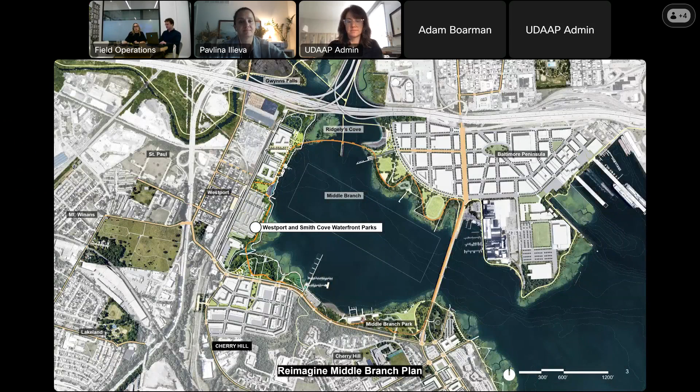So this is our site. We're working on a little bit bigger and more expansive than only the One Westport site. So we're working on this sort of corner, I would say the southwest corner of the reimagined Middle Branch shoreline and waterfront areas. Just flipping back and forth between what's there today, this is the long-term vision for the site. This is the Reimagine Middle Branch plan. And so you see this being a place of development and waterfront parks and trails coming together here.

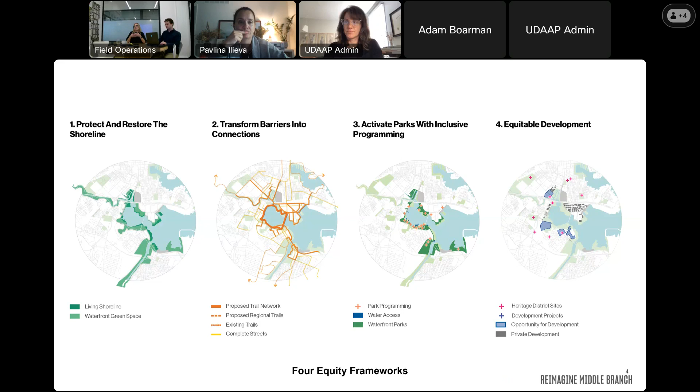Just as a very quick reminder, we had 4 frameworks we were working with in the master plan about the shoreline connections, activated parks, and equitable development. And what's exciting about the Smith Cove and Westport work is it's really bringing these frameworks together and realizing them. So zooming in on the site, I think you're all very familiar with where we are. But again, we're working at what we're calling Smith Cove, which is the western portion of Middle Branch Park. We're looking at the One Westport development site, parcel P, the open space there, as well as a DOT-owned parcel north of that. So that area between Westport and I-95.

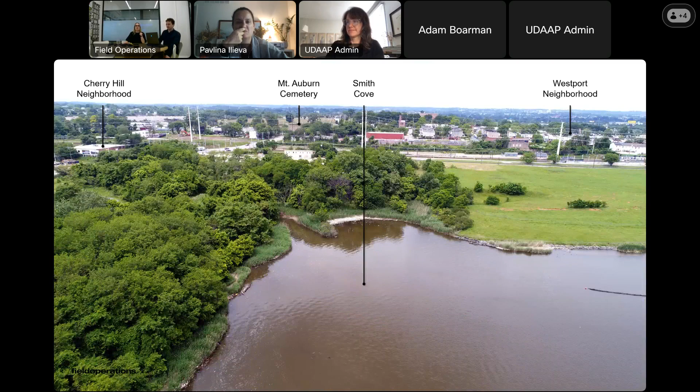This is a drone image we took of Smith Cove. The area is very kind of overgrown today. You can see Cherry Hill and Mount Auburn in the background. This is what the site looks like today. So it's park space. There is a boardwalk, there's an overlook, but it's quite overgrown and not in good shape.

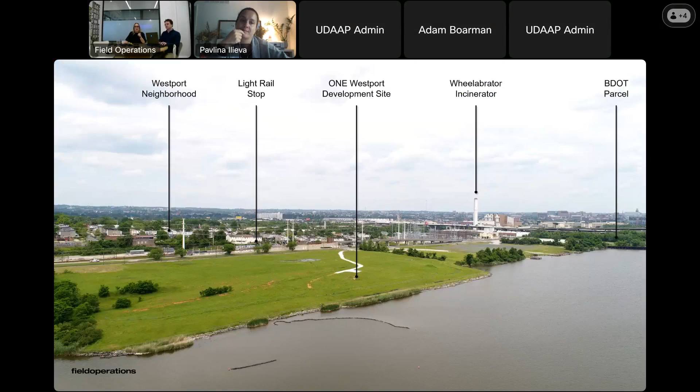This is the One Westport site and the DOT parcel from the water. And this is breaking ground next week. One of the major challenges we face is connections. The group talked about this morning, so we won't go into detail, but this image is a very visceral representation of all of those barriers between the neighborhoods and the communities and their waterfront.

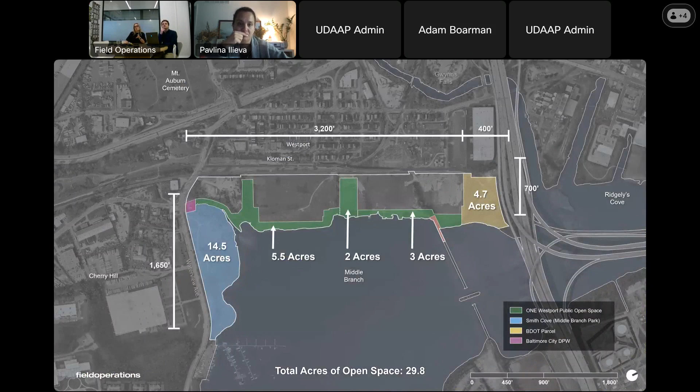This is our site again. These are just the acreages and the scale of the spaces that we're working with. We're just shy of 30 acres of open space when you put all of this parkland together. And that's really the big opportunity we see with this project and why we're so excited. 30 acres of open space in Waterfront Park is really significant in South Baltimore. And this connects to a much broader network of green spaces as well.

And for us, the vision for this park is really threefold. It's a community destination for the people who live in Westport and Cherry Hill. It's about celebrating the landscape of the Chesapeake Bay, and it's about honoring the heritage and the history of Westport and the people and the place.

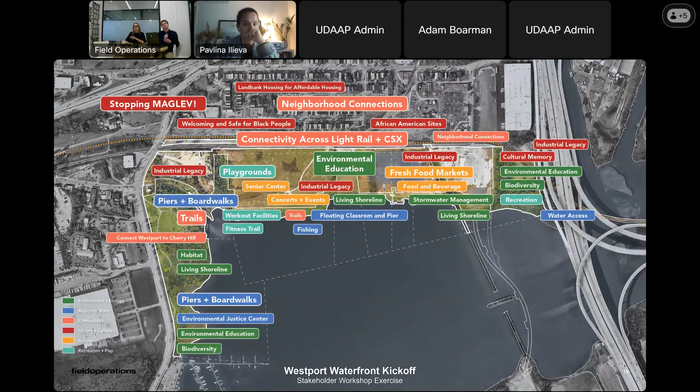That consensus building started with our stakeholder group. This is our initial visioning workshop with them back in May of 2023. We got many ideas about what should happen in this park on this site. What was very interesting was that all of this did reflect what we had heard in the master planning process. So we're getting very consistent feedback about what people want to see on site.

And overall, we got these 6 topics or 6 priorities that people wanted to see in the park. Connectivity, number 1. Number 2, the environment and ecology. 3, access to water, being able to get to the water and interact with it. Activation in the park, so how do we create spaces and opportunities for events as well as gatherings. Recreation and play, and history and culture.

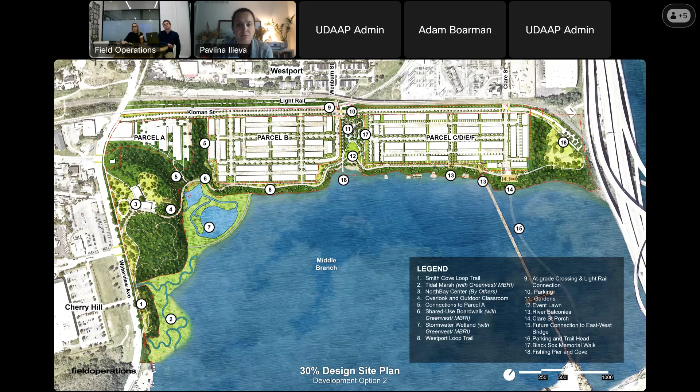As you can see, there's some options at parcel C. We know that our partners at Kimley Horn and Stonewall are working through those options now. We have some of those options baked into our deck here as well today, just for you to be able to evaluate.

The basis and the framework of the park is grounded in our circulation network. Connectivity is so critical and so difficult and challenged in this part of Baltimore that creating the trail network and making sure connectivity was working was paramount and number 1 for us. The network is based on the master plan, again, the idea of a loop trail. This loop trail circumnavigates the heart of the Middle Branch, 3 miles.

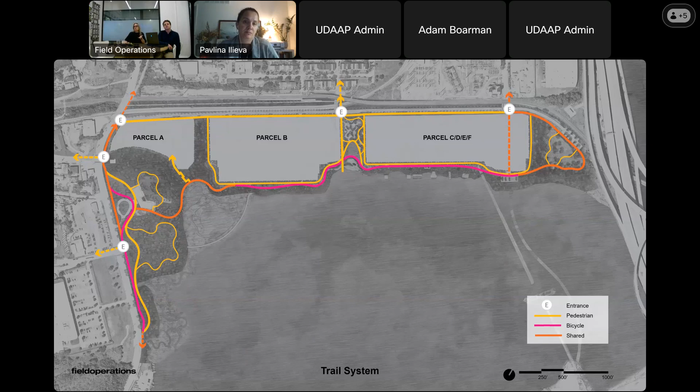...around the heart of the Middle Branch. And ideally that loop trail is a separated pedestrian and bike system with separate facilities for both of those types of users. In some areas we can't do that. We don't have enough space. So we create shared use paths.

In our 30% drawings, we've sort of taken from that diagrammatic level and started to think about dimensions and materials for each of these types of trails. Here you can just start to see how that plays out. This is the separated use trail at parcel B. So this is on the waterfront looking out to the water, and you can see the pedestrian path is quite close to those row houses that are facing the waterfront park.

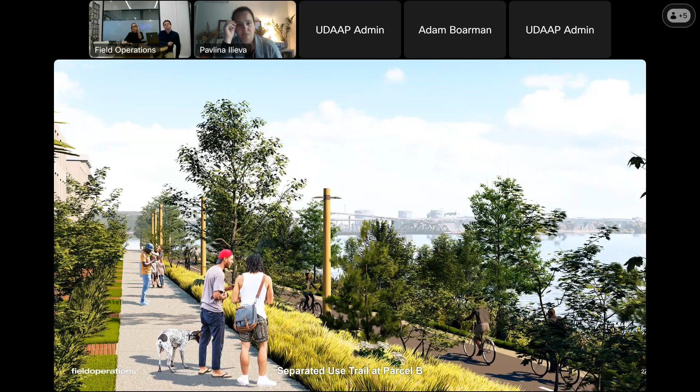Their lead walks connect to our pedestrian trail. And then slightly down the hill, you can see the bike trail, which is a two-way bike trail at 12 feet wide. And then you go further down to the green shoreline. Along the trail system as well are a series of features and crossings that we want to call out. One of the features is the boardwalk at Smith Cove.

I also want to mention here in this image, you see these expansive wetlands. One of our project partners is Greenvest and the Middle Branch Resiliency Initiative. They are designing a 5-acre stormwater wetland facility here, which you can see in this image, and we're collaborating with them on the design of the boardwalk. So this links Smith Cove to Westport with the boardwalk over the wetland, kind of hugging the shoreline edge.

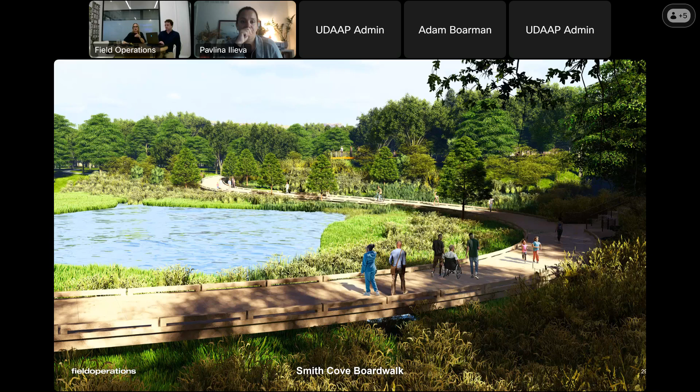And then at certain places, we have places to stop, get off your bike, or grab a seat and take in incredible views of the water. We're calling these balconies. We'll show you those in more detail later in the presentation. These balconies and many of the features in our park, as we mentioned before about the Chesapeake Bay landscape, the design is really trying to evoke the piers and piles that you see across the Chesapeake Bay and bring that to the park system in Westport.

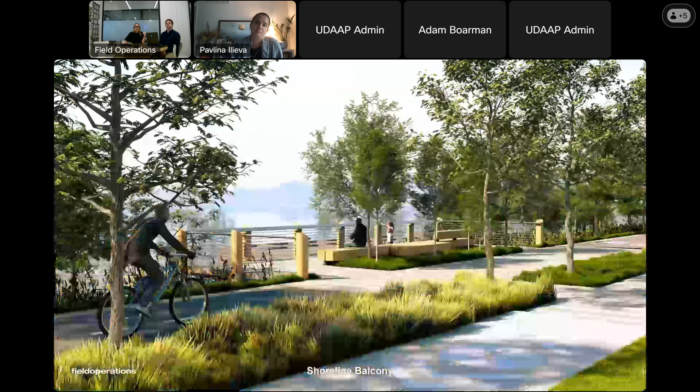So you can see here, this is one of the shoreline balconies, and you can start to see that play on the pier piles and the really chunky wooden furniture and the kind of native plantings here in this image.

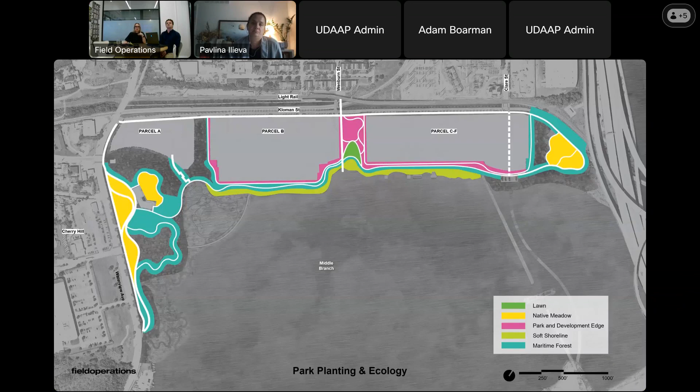The next layer we want to briefly touch on is park planting and ecology. We're working on what we're calling the 5 landscapes, going from the water and the shoreline, upland into maritime forests. We're looking at restoring woodlands within the parks today. We want to bring native meadows to the parks, have less lawn and more pollinator meadows and gardens. And we're thinking about this idea of a kind of maritime microforest.

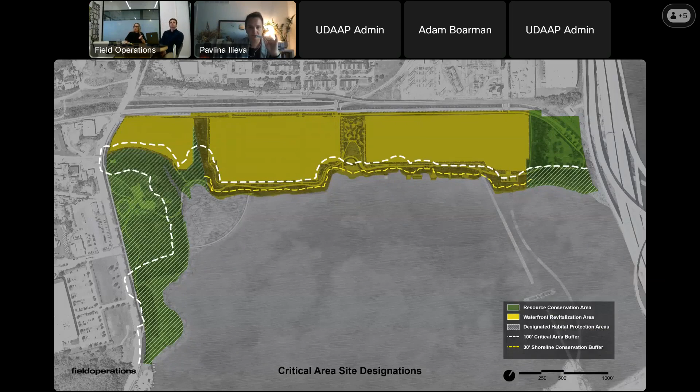We're working within the critical area. So we've done our due diligence and homework to understand what the requirements are to work in these various areas along the waterfront, where we can and can't do things, and what it means to mitigate in this area. So our afforestation requirements are really driving some of the planting design. And so we're using these criteria and these guidelines to try and think creatively about planting design here.

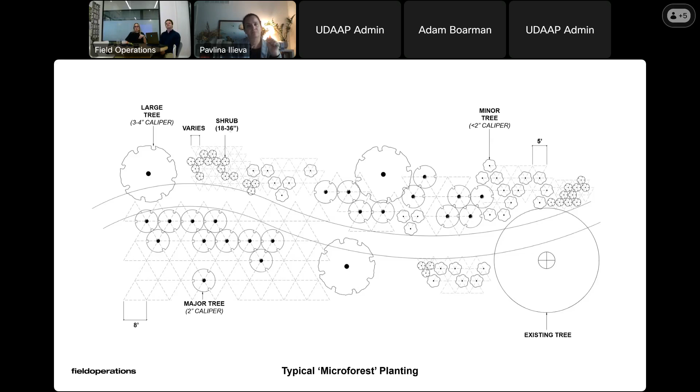Something that we're excited about is the use of smaller plant material, but in large quantities and spaced close together. This is how you would plant a microforest. It's how plants want to grow. It's how they want to be out in the world if you find them in the forest naturally. And we want to try and mimic this and use this as inspiration for the planting within the park and along the trails. This is an example of that in other places, and this is really at the forefront of ecological systems thinking in urban forests across the country.

So how are we grading the site? How are we reinforcing the toe of the slope? What are we planting here? And what other measures are we taking to ensure that we're creating a really robust but green soft shoreline?

At the shoreline at our park space, we've widened out and made a much shallower shoreline. Here we're calling it a gravel cove. You'll see images of this later, but this is the one opportunity we have to make a much bigger, more gradual shoreline, which we think is programmatically and from a design perspective quite interesting, and is also going to bring great ecological benefits to the park.

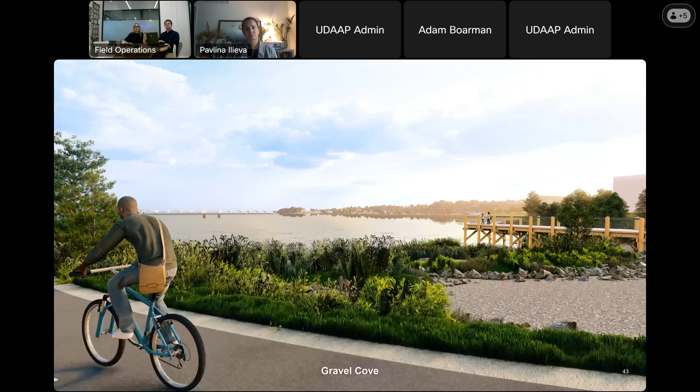This is a kind of inspiration image for us. This is in Seattle, but that idea of a soft gravel shore is interesting to us here. And so this is an image of that at the park space in Westport.

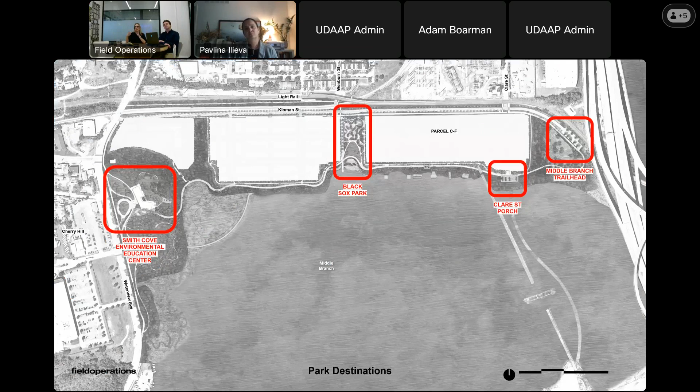Finally, I want to just touch on the destinations within this park system. So first, talking about the trails and the planting, we're really doing park-wide systems thinking. Now we want to zoom in and look at each of these destinations where there is a hub of programming and activity. We're going to start at Smith Cove and work our way north. We've turned our plan, so now we're looking true north as plan north. We're looking at parcel A, which is the Westport development and how it integrates into Smith Cove.

Our team through SVGP and the city are collaborating with North Bay, which is an environmental education nonprofit, and they are interested in potentially building a center here in Smith Cove. This is dependent on BCRP and the conversations there. So at the moment, we're holding a placeholder there. We can't answer too many questions about that today, but we're holding that space for future design considerations.

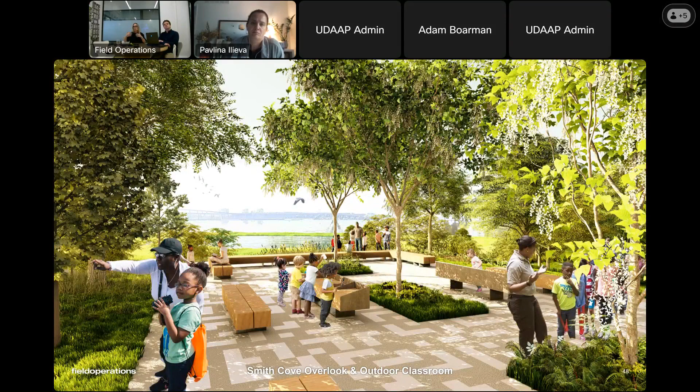Around there, there's parking and drop off for that center, nature trails, an outdoor classroom at number 8, a picnic area at number 6. Again, finding ways to gather and have smaller community events here in Smith Cove is the idea. This is the picnic area, and then this is the overlook. We're using the natural high point on site where the overlook is today, opening that up, making it bigger and more accessible, and creating an outdoor classroom here.

Now we're moving to the Westport Waterfront Park. So this is the space between parcels B and C, which is the larger 2-acre site for this bigger public park. Starting at number 1 at the top of the screen, this is our at-grade crossing. Getting people from Westport to the park is critical, so making sure that they have a safe way to cross is quite important.

That's a big challenge with CSX being there, having to come under the light rail, go over the CSX lines. It's not easy. But we're proposing crosswalks there to do everything we can to get people from the neighborhood to the park. Then once we're in the park, number 2 is what we're calling the promenade or Wenburn Walk.

This is trying to take the view corridor down Wenburn and give you the most direct route out to the water. So that's a promenade. There's lighting overhead. There's benches lining this promenade. And there's a clear direct extension out into a fishing pier to get you out over the water. At number 4 is an event lawn. At number 5 is a nature play area, and at number 6 is the beginnings of the Black Sox Memorial.

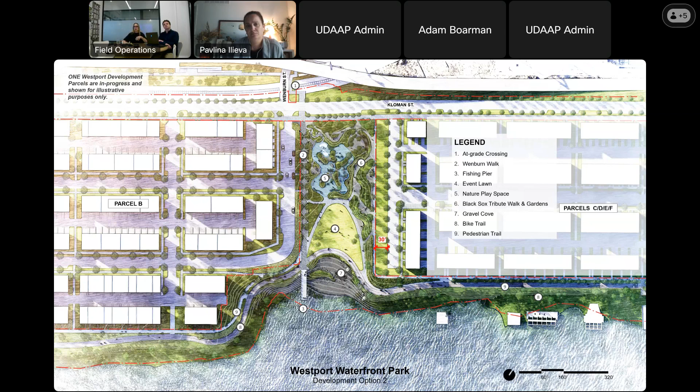Here we're just testing the 2 ideas. I know that the team shared options this morning at parcel C, so we just took those options and are starting to look at how they would fit on site. This is not yet totally coordinated. As you see, I think if this option were to play out, we would fully integrate that into the park itself. So the park would essentially grow by 30 feet here. We would rework the planting and the circulation and otherwise.

And then this is just starting to look at views of the park here too. So you can see that gravel cove and that soft shoreline in the foreground, the fishing pier, the bike and pedestrian trails, Wenburn Walk heading back to the neighborhood, the nature play area, and the memorial. And then again, we're just showing the options here at parcel C.

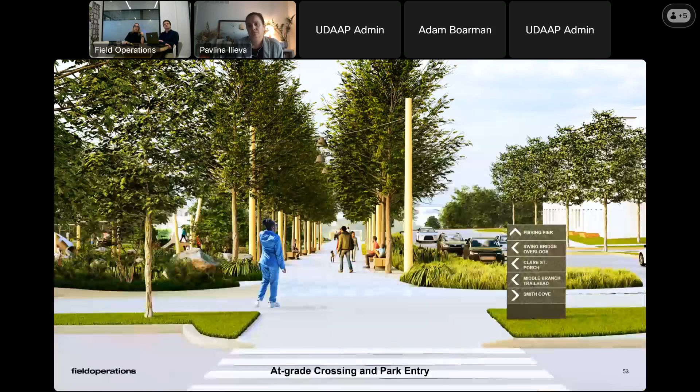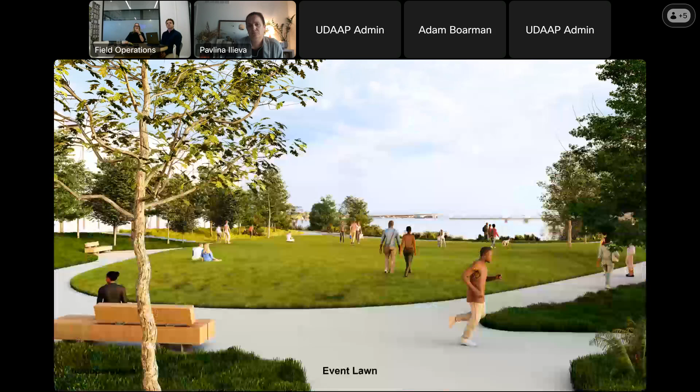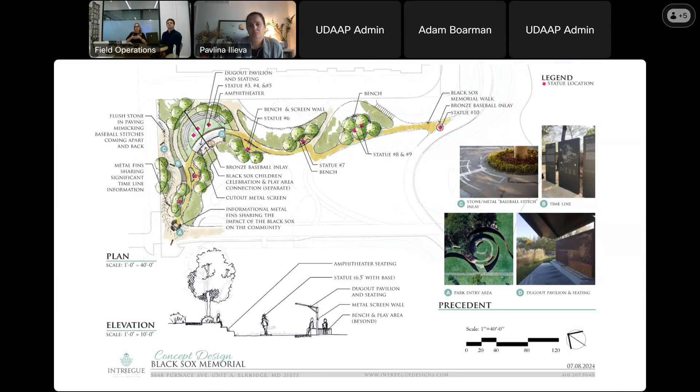A couple of views. I'm not gonna say too much here because I know we're trying to go quickly through this, but these are a few eye-level views of what the park would look and feel like across these different areas. This is not our work, this is the work of the Black Sox Memorial team, but we've been working with them to integrate their thoughts and ideas about what that memorial would be. I think next steps there are to start to think about engaging an artist, doing more public engagement work here to really understand how the memorial can be sited and integrated into the park design.

And then the last destination in the project is north of the One Westport site, what we're calling the Middle Branch Trailhead. So here we're extending Kloman Street into the site and creating a parking lot. From the parking lot, we have a spot to get out, take your bike out and get on the trail and take a multi-mile ride along the Middle Branch Trail. So if anyone's coming from further afield and they want to do a big ride, this is where you would start off from.

And you can see other trail connections and the other footpaths through a restored meadow at the trailhead site. This is a view of that swing bridge balcony. This is a view of the Clare Street porch. And then this is an overall aerial showing the project in its totality. And that's where we'll stop. Hopefully we got through that quickly. And we're very excited to chat with you about the design.

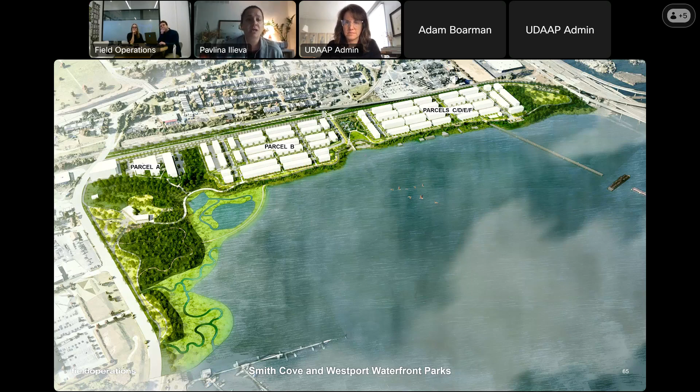So as part one, we would love to zoom in and get a complete picture of some of your design decisions at this point. And then on another note, we would like to pick your brain about some of this additional integration. So if you don't mind going to your site sections, there were just black and white drawings showing sections through the park and then another one through the townhouses.

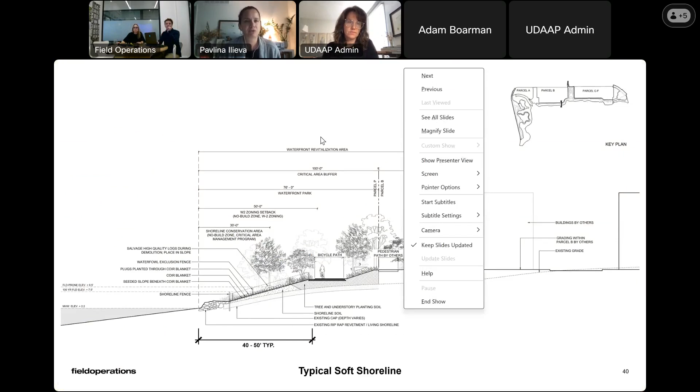And they were clear enough to understand in totality, but I wonder if you can zoom in just a little bit more so we can read the notes as well and give us a dimensional understanding and also conceptual understanding of the layers involved in this section. And specifically, this is the subject that came up earlier, especially the portion of the master plan that has changed the most with respect to typology.

Yeah. Obviously, the entire north half of the site is now townhouses. And so as part of our previous discussion, we questioned this idea that before, the townhouses were in a very designated portion of the site that was always intended to be a little bit more intimate, a little bit more private, where you move around the periphery of this.

And now by virtue of this becoming all attached dwellings, whether they're stacked or single family homes, it has so much more of a private experience and interface, so much so that even in your plans, all we're showing is just circulation around it. You can go bike around it and walk around it, but there isn't really any kind of a connection.

So in a previous conversation, we were saying, how do we negotiate this very private experience of somebody's front door right there at that stoop with something that everyone is welcome to come and bike and walk right around? What are those, both in terms of dimension, but also nuance of use? And particularly with this, we want to hear your thoughts. What are your thoughts on this?

The concern earlier was, is there the perception that the waterfront is more privatized? Yes, you can come and walk here, but you're going to have to park way over there and follow this trail, whereas these 12 or 15 houses have the front door open to it and looking onto the water.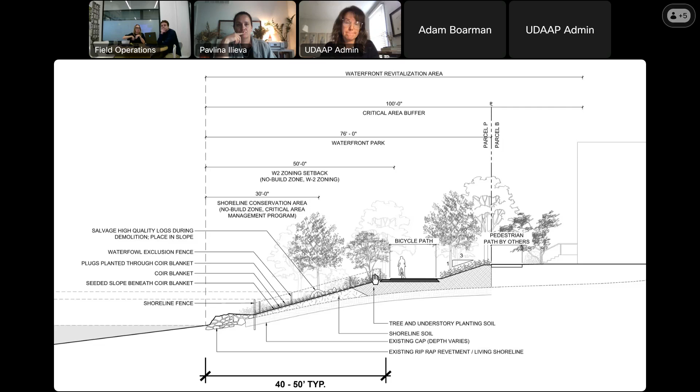On the other hand, I agree that there is a sense of, how do we not make that feel private, right? What can we do here so that that's not the case? I think the way that we are trying to do that in our design is by creating these features and these stops along the trail so that folks, when they're in the park, they're excited to get to the Clare Street porch. There's something else there. There's a piece of program or activation there that draws them through the park to get to that destination.

It's a lot like designing a linear park in that way, where you're trying to have certain continuous elements that are quite strong, like the trail is here, and then break that up with features and destinations that create a kind of episodic journey for you along that trail. So hopefully that kind of helps unpack that a bit. Happy to continue if there's other questions people have.

Yeah, certainly. It helps us understand how you're looking at it and what conversations you've had with others and how you're navigating kind of this relationship. So to that end, help us understand where it says bicycle path, and you had another diagram that showed how much of it is shared and how much is separate. So is that just a bicycle path or is it also a pedestrian one? Because then the pedestrian one is on the private parcel.

Yeah, we'll go back and look at that plan just so that we can understand the extent of it. But before we do that, just so we understand clearly, this experience that you are on a trail kind of within a landscape is really only happening on the bicycle path in this particular condition, because the pedestrians will really be walking in front of the stoops. I mean, the experience of the waterfront for the pedestrian is actually the one there on the right-hand side in front of the townhouses. And the experience of kind of within a landscape is really on the bicycle path. Is that a fair statement?

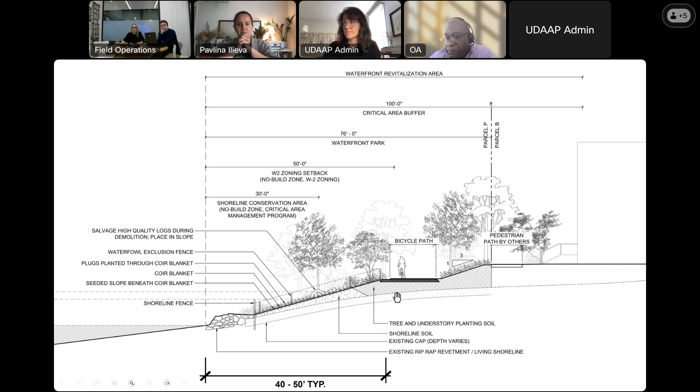I think it was really important to zoom in and see how much indeed we're pushing from the water, right? There are all kinds of buffers and all of that literally puts the line. You can't go any further to the left, right? And naturally the same thing is happening on the right-hand side. So it's important for us to understand the limitations, which we now do. So thank you. Let's do a similar thing with your other section, so that we can zoom in a little more and see, again, dimensionally and in terms of these different zones. We see with the dash lines on the left where the floodplains are pushing your little wall all the way there. So really that's this gravelly landscape that allows for the ebbs and the flow of the waterscape to come through. And then if we can pan to the right, walk us through the rest of the thinking, please, in dimension.

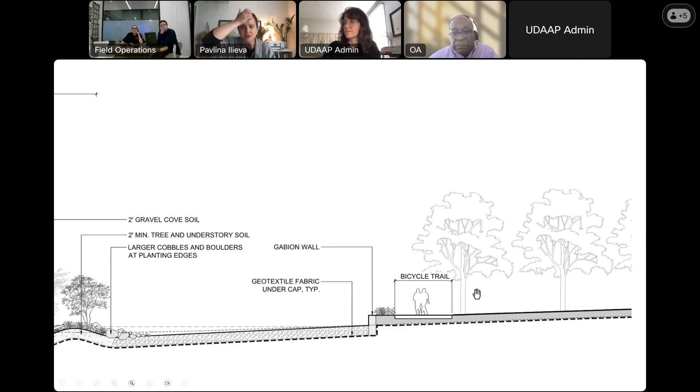Sure. So here. Oh, that's the end of this drawing. Maybe there was another one because it was showing more, I thought. Maybe not. Let me zoom out one more time. So this section is really just at the shoreline. Okay. We could find others, but yeah, you're right. So in the park, and we have a 3D aerial image that shows this area as well, to the right here where my cursor is would be the sloped lawn. At the toe of that lawn is the bicycle trail. And then we have a gabion wall that could be a seat wall there, which is the edge, and then to the gravel cove.

And then we would have our very shallow sloping gravel cove moving down into the water. Today, actually, what's interesting is we will be excavating this area out.

There is a kind of berm here that's heavily planted and it blocks all the views of the water in the park. So we don't want to keep that because we want the park to have the big open, beautiful views of the water. So we are sort of modifying that slope and moving that earth around to use that in other places for earthwork within the park. And this becomes this gentle slope.

Understood. Oh yeah, thank you so much. It's nice to see it, to understand sort of the modification of it, and the fact that it becomes a lot more gradual, softer, and it takes a lot of the movement of water. Thank you. This is very clear now. I'm going to pause my questions here. I know that the rest of the team will have other specific drawings they want to zoom in on, but this covers some of the initial kind of let's read this a little bit closer.

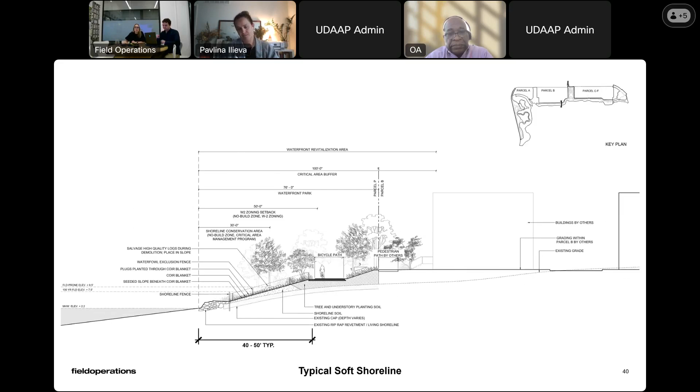Yeah. So there are places within the design where we're encouraging people to walk next to it, such as at the boardwalk and that marsh area. We're trying to keep out of the floodplain with our trails, so we are lifting higher than where the shoreline is. But I think that's a great point. Another issue, like we saw a constraint, is that we sort of need to get up and high anyways. We talked about the elevations, but there are key points. This is one of them where people may be able to get closer to the water.

But there is this real tension, I would say, Osborne, of do we want to overtly encourage people to get to the water or not because of the state of the water quality today? This is a big question. We've heard from many people and a lot of pushback that no, it's not safe to be close to the water, so the design should not encourage folks and invite folks to get close to the water.

Except that I thought I saw a very important portion of your program central to all of the site is a fishing pier. Yep. So what are we thinking? I know. I mean, that's part of the tension too. I would say, Osborne, that the water quality is not good. However, culturally and socially, there are a lot of people who fish around the Middle Branch. There are a lot of members of the community who are out every day fishing.

And we heard this and so there's this tension playing out for us in the design of, do we want to support those members of the community who are activating and bringing life to the park every day? Do we want to take on what the public is asking to sort of have a fishing pier here? Or do we need to step back and not allow people to do that?

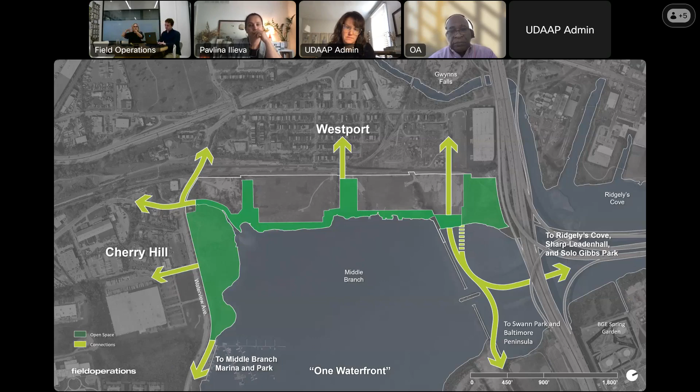So you're acknowledging it so that it's understood that you're not precluding the future connection. I think that's what you suggested. Exactly. And then what we're trying to do within our site boundary is make sure, like at the Clare Street porch, there's room and space there that does not prevent a future bridge and connection from coming in and landing there.

Got it. And then one final question. So the extent of your scope does not reach Kloman, with the exception of the parks that extend up that way, right? Or are you responsible for conceptualizing the crossing as well? The crossing from Kloman to the communities to the west. So we are advocating for that crossing, but the Kloman Street design is being done under a different contract with a different set of designers. Got it. All right, thank you.

You'll hear in my comments, I think there's a contradiction in your design related to the bike paths and the pedestrian paths, but I'll make those comments eventually. I think in part that's what Pavlina may have been alluding to. Thank you, Osborne, for your questions. We'll come back with comments shortly. Kevin, what are your clarifying questions for the team?

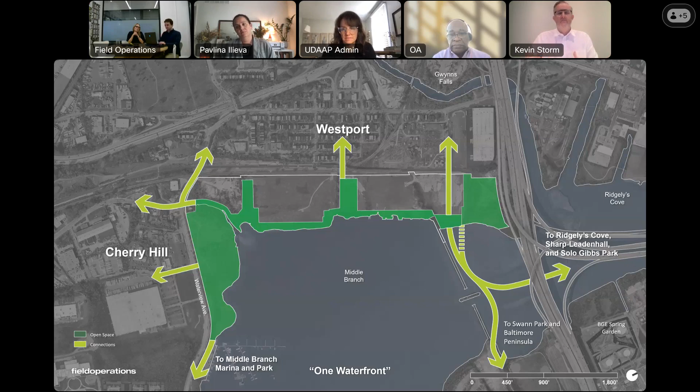Most of them were taken by the section discussion, so thank you for that. But I do have a question, and apologies if I missed any of this in your presentation, but could you talk a little bit about integration of welcoming and supporting amenities, like frequency of benches and bike storage or public restrooms, I think are a big one. And as a follow-up, was there ever any discussion about integrating some sort of small-scale retail kiosk, a small coffee stand or something in the park, to give people an invitation to stop and relax and enjoy?

Let me just, Kevin, pull up the plan to talk that through. We could start with furnishing. We have noted where our moments of pause are along the trail. There's a picnic area here, the outdoor classroom, the benches throughout the park space along Wenburn, along the edges of the lawn, through the garden space and in the play space. And then along the trail at the balconies at 13 and at 14 at the Clare Street porch. And there's another one here, which we failed to label, that dot is another spot to rest with benches, and then at the trailhead there's a series of benches and furnishing.

Also throughout the plan, there are bike racks. There's a cluster of them here at the trailhead, knowing people are getting on and off the trail here, as well as at the entrance of the park back here on Kloman Street, and a number clustered here at number 3 in Smith Cove Park. Lighting, we are proposing lighting along the loop trail itself, and then within the 2-acre park space in the center.

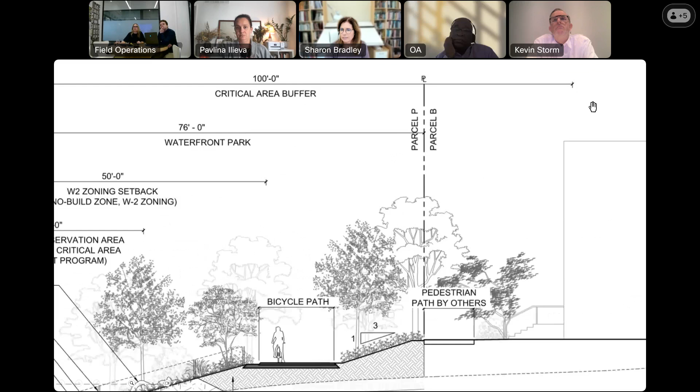My guess, Sharon, and I think it is a question for that team, but my guess might be if we look at my key plan up here, there are some areas in front of C through F where the shoreline is eroded and we get what we're calling pinch points. Let me just zoom in and hopefully you can see it on that map. You can see that it varies along this edge where there might be a pinch point in some of these zones versus where you have a wider space at the waterfront.

And I would imagine that 55 foot is potentially at one of these two pinch points here in front of C through F. Okay, and in those situations, your section would look quite different then. Yes. Okay. It becomes more constrained. Yes.

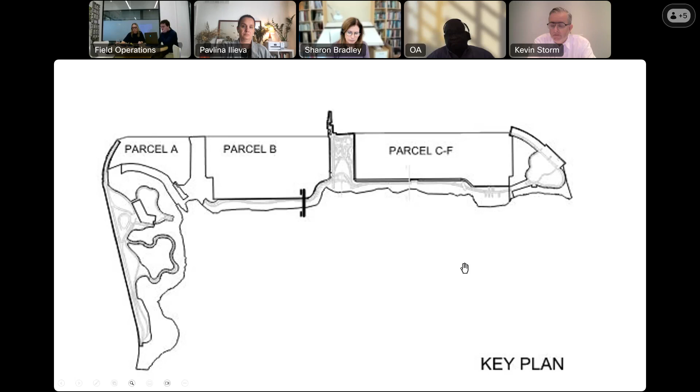Okay, and one of the questions I had, I think you answered with Osborne's question, is you don't really introduce people to be at the water's edge. The closest looks like maybe the gravel cove, where you don't go onto the gravel area. Correct. But you see it on the path. Okay, I see.

Okay, and it's so difficult to separate the issues between the townhouse development and yours. So do you happen to know the width? Because you do have the section here, this pedestrian path by others, what the width of that path is? 8 feet. It's 8 feet? Okay. All right. Those are my questions. Thank you.

Okay, thank you, Sharon. I only had a couple more. If you don't mind, on the larger plan, it's showing a connection to parcel A. Can you please elaborate a little bit on how you're connecting to that parcel? Yeah, maybe I can show you on the zoom in plan. Sure. That might be an easier place to see. So

we have a few elevations noted here on the plan, and that is to sort of underscore how steep this slope is. We have to go from 5 elevation where the boardwalk is up to 33, which is where parcel A sits. So we're at a very steep slope and pretty intense climb to get up that hill. And we are also in a critical area zone where clearing a lot of the existing trees is not wanted from a critical area perspective. So we're trying to keep a fairly small, tight footprint here.

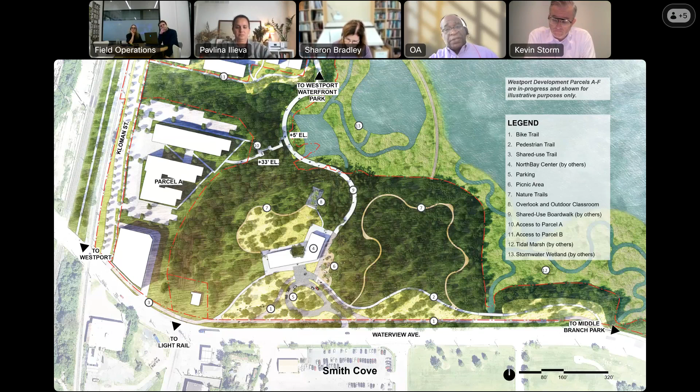Yeah, if it's okay, I just have one very important question to ask, and I'll jump right into the comments. If you recall on this section, I'm trying to understand where exactly is the natural water line, and where exactly is the tidal water line? Does that come all the way up to the bike path, or does that top off at the top of the riprap wall? Let's go back. We have those marked in this section, so we can show those to you.

So here, oh no, I was trying to zoom in. Okay. You just give me an idea. I mean, is it, yeah. So mean high water is plus 2.2. 100-year flood is 7.5. And our bicycle path ranges, it kind of goes up and down. The lowest point, I think, is at like +8, so that we're above the 100-year flood elevation. Wonderful. All right, thank you so much.

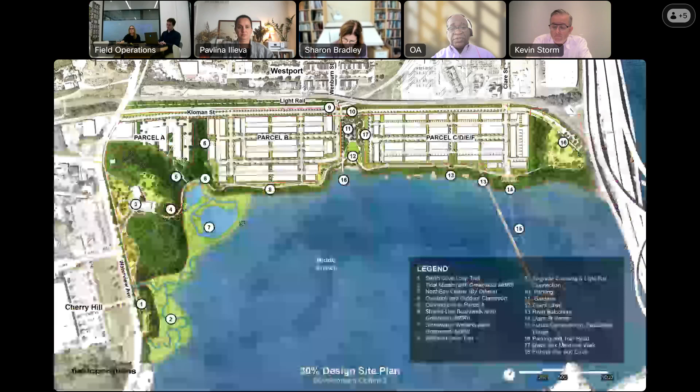If you can just jump back to a site plan, I think I can probably get through a comment or two pretty quickly. So when I look at this, initially when you did your layout, the presentation, et cetera, it was done very well, and to be quite frank, I'm extremely interested and impressed at this site and the robust framework that your team has mapped out to really deal with the challenges along the shoreline and potentially create a framework or basis by which the other development teams can come and stitch their parcels into what you're doing. So in that regard, I commend you highly.

But as always, you've heard the saying, the devil is in the details, right? And so is God. So as we zoom in and we look at this, we become a little bit more critical, not in a bad sense, but in a curious sense as to how things actually work, how things come together, and why decisions are being made. And I think you've been very forthright in explaining that to us, and I really appreciate that. But as we zoom into any portion of this plan, there are things that still need to be resolved. I'll first start with the things that I think are meaningful and done well.

The fact that you've identified destinations and you've carefully positioned those destinations, not just based on where they are on the site, but you've integrated the natural landscape into that. For instance, the tidal marshlands, everything that's occurring to the left of the screen, which I guess is to the south, as well as the park to the north, and how you've begun to integrate that and use it to the benefit of the project, while respecting the natural landscape. These destinations are not just points of interest, but they begin to anchor the project overall, particularly the one to the north, although it's much smaller. You can see how you're integrating access back to the greater community by introducing that parking area and so forth.

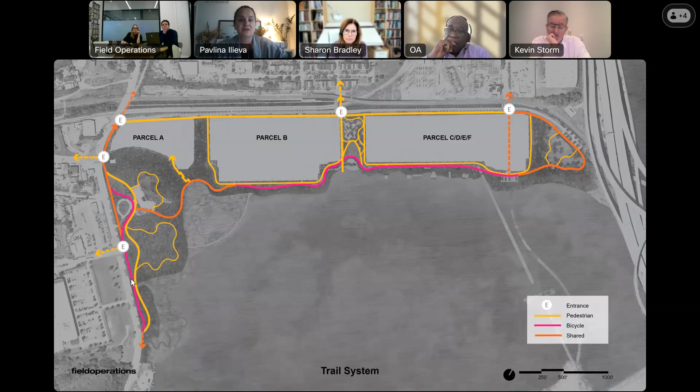So again, all that is a long way to say there's nothing you can do about what ends up being built on there, but there's so many things in the design that should be done that really start to anticipate that. So if we can go to the section now, in front of the row houses, I want to share with you some of the concerns that we explained earlier from the development perspective, but now from the park perspective as well.

I think the idea is that everything should feel integrated and continuous. Like Kevin is saying, that separation between public and private should not be reading in the ground, right? In other words, in great urban spaces and cities in general, you don't necessarily see that designation, and that's the beauty of it. We explained it earlier to Parcel A, how to make their parcel feel more inviting, urbane, and seamless, right?

And at the same time, successful urban spaces also have this very well-crafted design language that is clear to people, and there's a wonderful ambiguity to a degree that provides the richness of the experience, and then there's this clarity in the design that also delineates some boundaries that are a little bit more subtle and contribute to a more enjoyable experience.

So, for example, there's a difference with that path that's in front of the stoops there feeling like a public path, right? So you're on that path, there's no bathrooms anywhere in range. Do you know where I'm going with this? Yeah, yeah. And 3 feet away, there's somebody's stoop right there.

And I'm only saying this because it's happened at my stoop, you know, in the neighborhood in the city. People will sit on it, people will sleep on it, people will do whatever else they want and need to do right there on it, because it is so immediately next to a 5-foot sidewalk that you have simply no other place to go, right? So that's the kind of ambiguity that I can see sometimes not working out really well for the residents and creating a lot of tension and a lot of conflict.

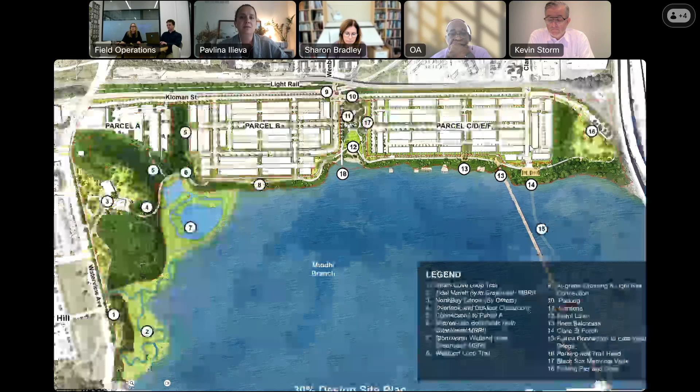So our ask now is to start to look in that other direction and really consider that people may not be arriving on those just on the trail, but if we are to make this a very connected neighborhood, go back to that first goal that we were discussing that we're not quite accomplishing yet, these nodes need to work 360. I see that right now you're trying to align them with stuff, and that's merely getting there. But I'm also curious about how they start to model the buildings. And how do they start to create mini hierarchies within them?

Because right now, and we talk to the developers about it, there's this relentless multiplication of 3 types of attached dwellings, right? But all conditions are not the same, right? At some points you're arriving at this perch, at another point you're arriving at that perch. It can't all be the same behind it, right? So if we're talking about things being integrated, I think those are the discussions and the modifications in the design that need to happen. And I think they need to be baked into the site plan in many ways, kind of through the alignment.

I'm looking at number 13, that bridge arriving there, that experience, and that angle is everything. And yet you go 10 feet more, nope, we're back to the 8-foot trail with that one row house there on the corner, so what, nothing happened, right? That's what we're looking to see. This plan and the connection between the development and the park will not be complete until these big moves and these ideas you've created in the landscape are followed through in the neighborhood.

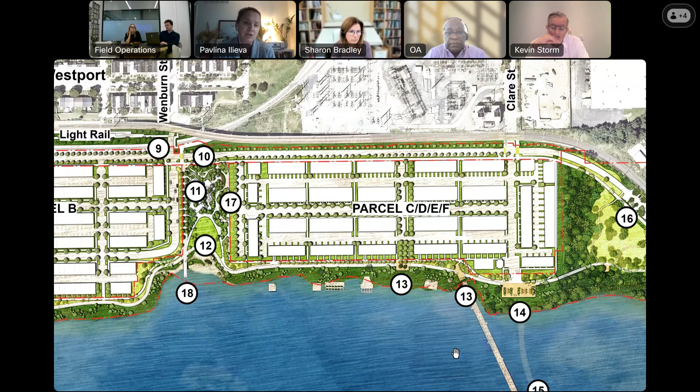And then similarly for the other portion, which is on the south end, with potentially the proposed new building there, I think it's important to also understand how much of the different activities and uses that the community might want in the future, and as it continues to grow, hopefully more residents and economic development is spurred here, how much of this design can accommodate for some of those things.

I think the idea of the anchor element there is huge. We know that every major park place needs its steward, and having a great organization that anchors it really adds a lot. But I wonder if there's more synergy that can be had there with some of the other needs of the site. And it's probably already happening. It's just once we get a chance to zoom to it, I think it'll be important to track that as well.

So we are a little over time. There's so much to talk about. This won't be, of course, the last time we see this and we work with you, but we want to thank you for the fabulous work that is done. It's not easy. You have more hard work to do. And I think some of the items that we highlighted are probably a little bit more of a priority because they inform and affect how all of these other projects develop.

So just very quickly, I want to check with the rest of the panelists. Are there any additional comments that came to mind since you spoke? I want to make sure that we cover everything.

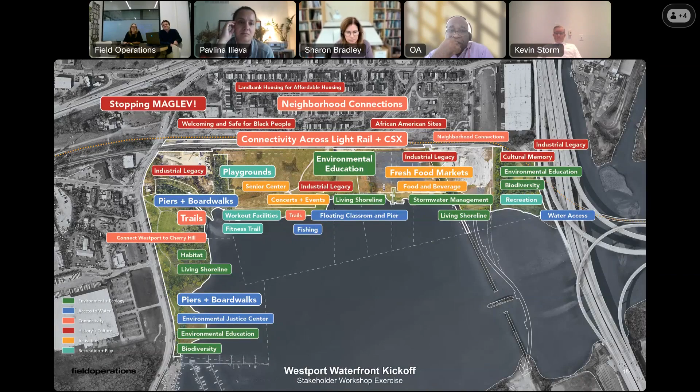Could I ask a follow-up kind of logistical question of the panel? Is there time for that, Pavlina? Yes, please go ahead. So I really appreciate all the comments today. It's really fun to talk to other designers, so I really love this forum. I had a kind of, maybe it's a procedural logistical question. Maybe it's just advice from this group.

When we look at the section and we think about what we can do here, I agree, we would love to continue exploring what can be done, and I totally understand all the comments today about the pedestrian trail. Because of this constrained space we have, which the section really describes, we're working within the W2 zoning setback of 50 feet. Is that something that you think we could push on a little bit and get some variance for to improve the circulation within the park space? We're working in a very constrained area, and a lot of our design has been driven by those dimensional constraints, which are tied to city regulatory frameworks.

So yeah, I think that's a valid question. I think this is entirely in planning department's purview to answer it. The panel, all we can do is offer comments that are hopefully helpful to you in furthering the design. But your question is very valid, and I would say that on many projects, a lot of these variances and modifications happen because the city is interested in the best design we can get. So the quick answer is yes, I think it's something you should absolutely discuss. What pathway there is to it and how possible it is, I think Ren and the rest of the team will be able to answer that more directly.

Wes, if I may interrupt for a minute, are you controlling the slideshow? I am. Are you able to move your mouse? Yes. Let's see if we can see it, because some of the text is very small on the drawings, and it'll be good if you can point to things that you're describing. Yeah, I will. Go ahead. Thank you. No problem.

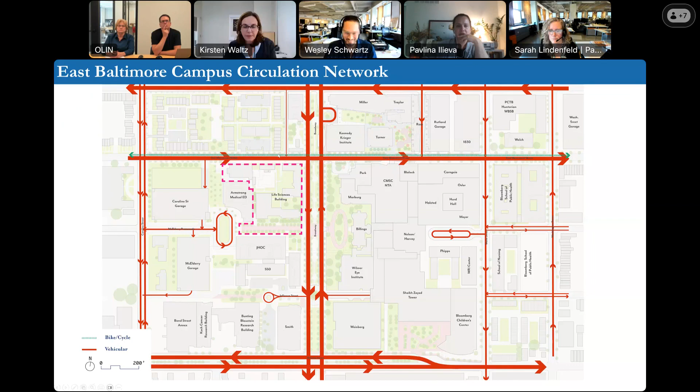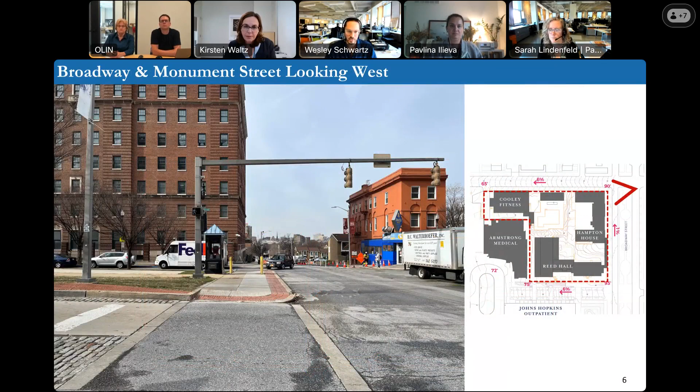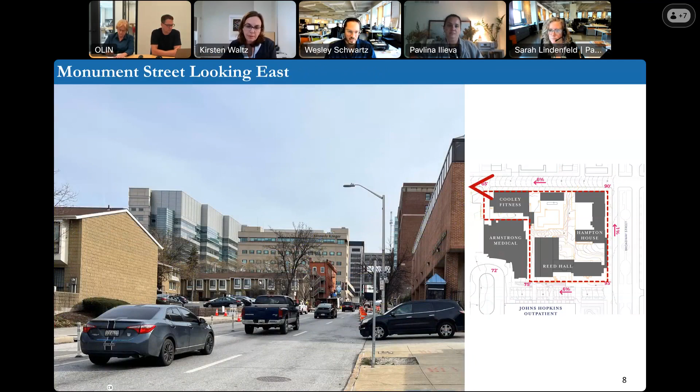And then, while the site is bounded by Broadway and Monument Street to the north and east, the south side of the site is bounded by McElderry Walkway, which is a former street that was closed about 30 years ago to create a pedestrian pathway up to the hospital. You can see the historic Billings building in the distance above this.

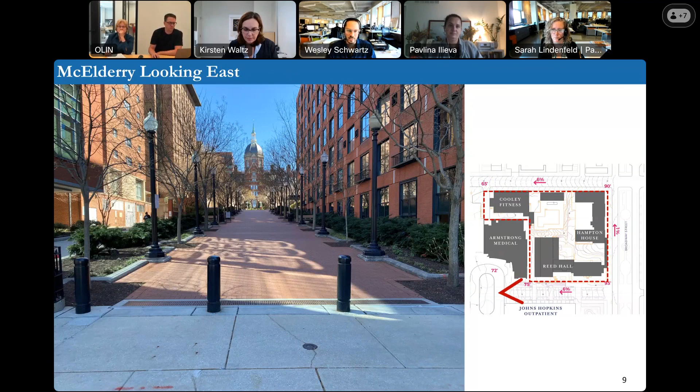As we look at the zoning on the site, it is located within the hospital zone with an allowable height of 218 feet. However, the residential zoning area just to the north of the site defines a daylight plane that cuts through the site. So there's essentially a 40-foot building limit and then a 45-degree plane that limits the building to the north side of the site.

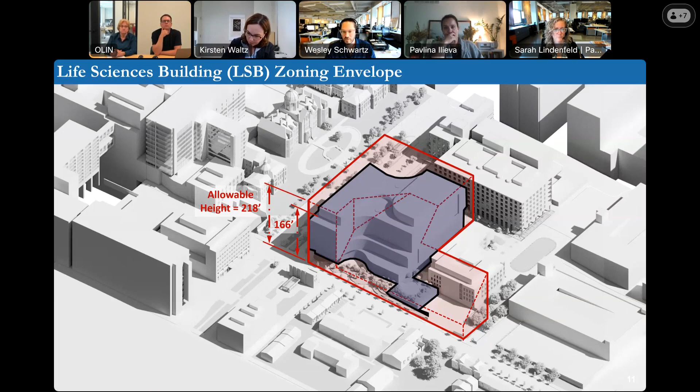So as we look at the bulk massing of the building on the site, the building we are proposing is about 166 feet tall. So it is much lower than the allowable height, and the massing of the building fully complies with the zoning envelope as it's laid out. We'll present shortly how we've done that, but there's a series of terracing along the north side of the building as well as on the south side that steps the building down and generates landscape spaces.

So one of our primary concerns was how we build this new large building into the language of the existing site, thinking about the historic Billings building and how we can have the building participate in creating a large urban room along Broadway. The existing outpatient building has a cutout corner with a landscape space, and we're proposing a similar large cutout and major landscape space along Broadway facing Billings. And then as we terrace the building down along Monument Street, we are proposing a fairly major landscape intervention to both deal with the slopes on the site as well as to soften the edge of the building.

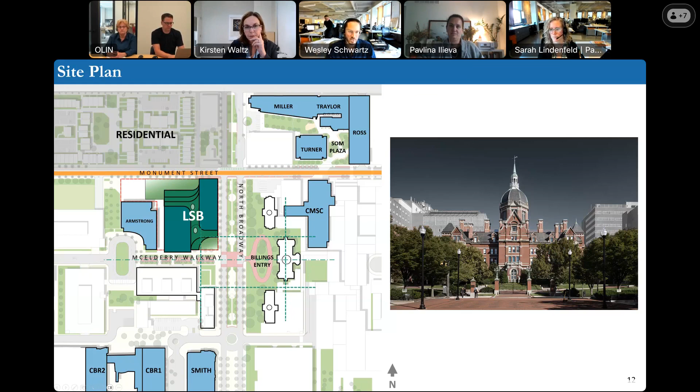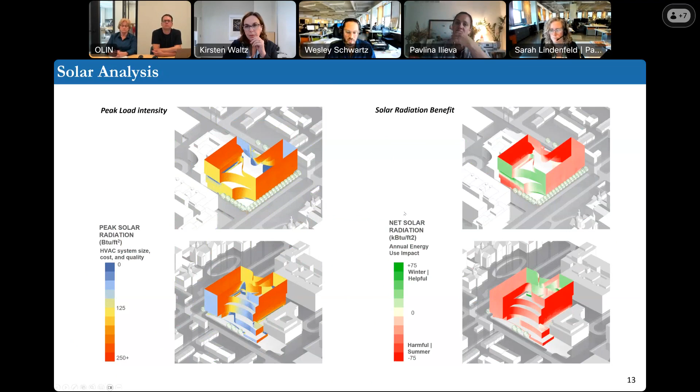As we're looking at the site, we are also carefully studying the solar performance of the building. This building is very much facing directly east and west, so there are very high solar loads on both the east and west elevations. That really builds into how we think about the building envelope and the design of the facades on the building.

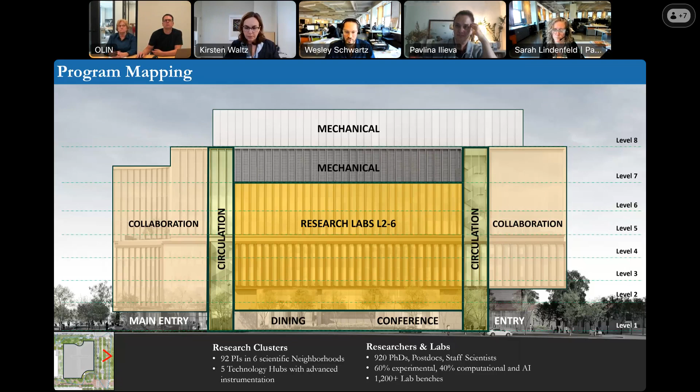As we come over to McElderry and Broadway, we have re-envisioned some of McElderry walkway up to a major landscape space at the intersection of Broadway. Again, that terracing builds back and breaks down the massing of the building, working up from the ground.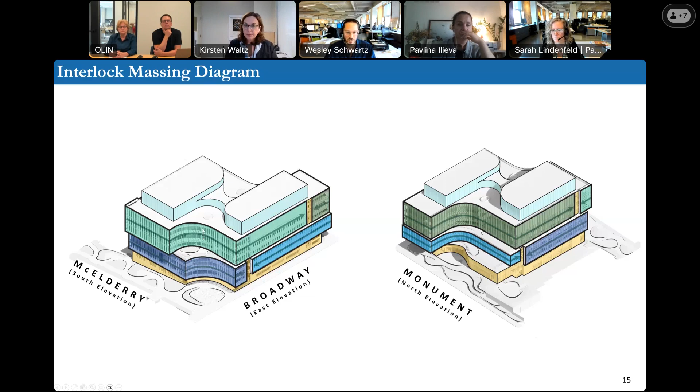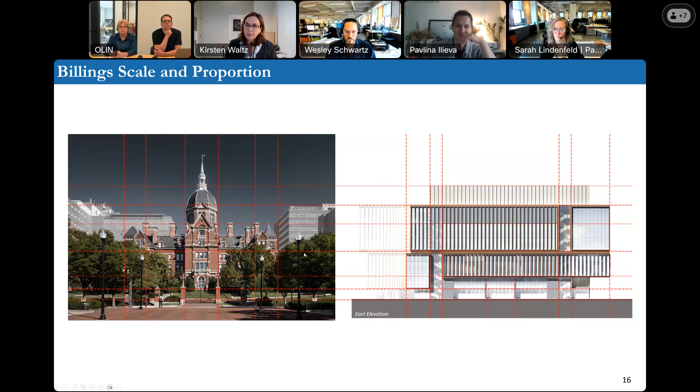A major reference point for the design was the historic Billings building, directly across from the site. We've worked carefully to align major datums from the existing Billings building into the facades of our project, and to break down the mass in similar ways to create a very cohesive site.

Here's a view of our schematic design. Billings is to your back. To the left, you're looking down McElderry walkway, and this is along the east facade along Broadway. You can see some of those terrace spaces, as well as the way the interlocking massing breaks down the scale of the building.

We're looking at a more bronze or copper colored base of the building, which ties to some of the brick colors on the site, and a lighter bronzy tone on the upper part of the building to lighten the mass.

From Monument Street, looking towards the main entrance at the corner of Broadway and Monument Street, you can see down the hill an existing bus stop that will be reinvigorated and rethought as the project develops. Here we've stepped back the mass from Monument Street, and we are cantilevering the building above to open up the views and the connection to that new major landscape space.

Here's a view from more or less where that housing is along Monument Street to the north of the site, looking back at the building. You can see that major landscape space along Monument Street and the building terracing up back away from Monument Street.

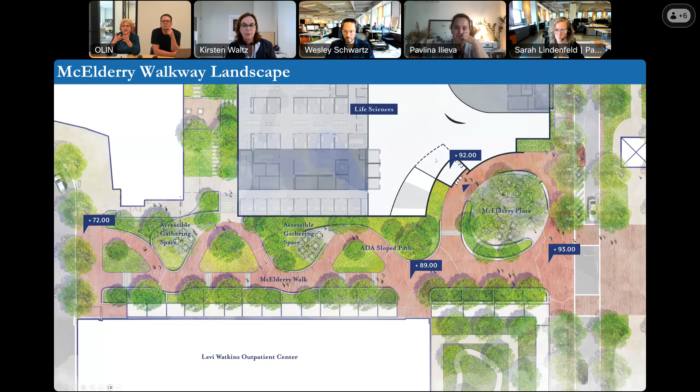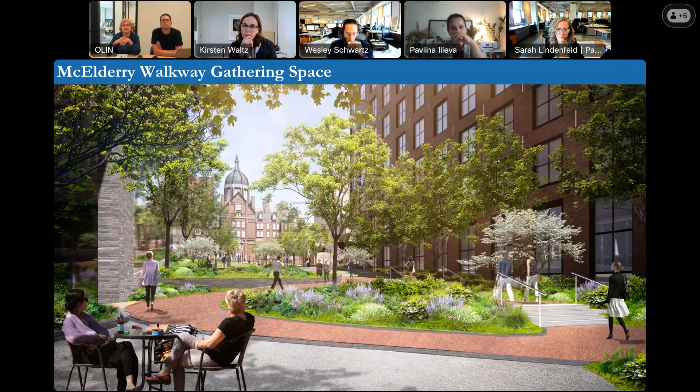So you can see we're trying to keep the view, this historic view, very open, but we're really trying to make quite a different type of space along McElderry than there currently is. Next.

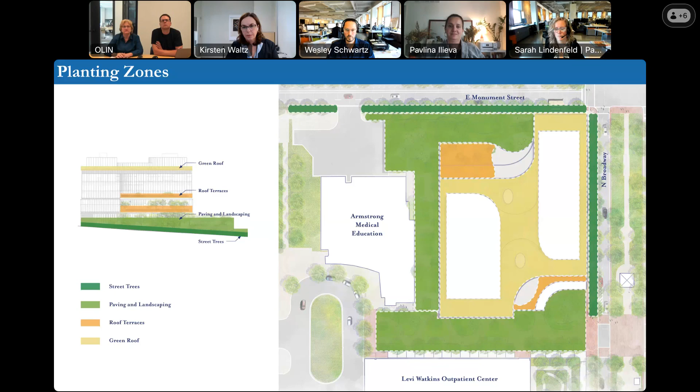The overall planting strategy, I think you know us well enough that we're native as much as we can, but still really durable plants, and understanding where they would be, and also in organization with this calmer east and west side and more exuberant north and south side. And also we have some roof terraces that we're working with, but as you can imagine, the palette would be, you can see in these next series of slides. I don't think you would be surprised in any of our plant selection and our palettes. Next.

I think in that lower level, in the shrubs and the perennials and the grasses, is where we can really get a lot of richness and seasonal interest and texture. Next.

Is that the end of the presentation? Thank you very much. That's it. That is the end of the presentation. Great. Thank you so much. Well, thank you. You're welcome. That was indeed very efficient, very clear, very quick. It's very much appreciated. We might even end on time. I might be able to see the whole thing. Thank you all. Much appreciated.

We'll have our Q&A real quick here to see if there's anything we want to clarify, but I just want to say, wow, what a transformative project, right? Speaking about transformation and really the commitment to looking at the buildings within the campus, but also the way they interface with the ground and with everything around it. I think we've had these conversations for several years now through various projects. And I think the one up the street on Monument was one of those very first ones that was saying there will be greater transparency in the buildings. They will be touching the ground in a more interactive way.

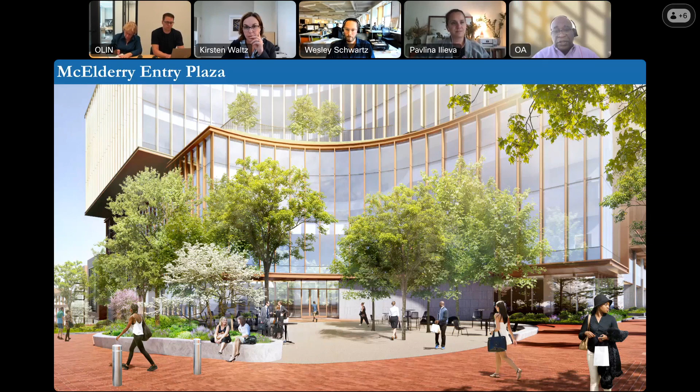With that said, I just want to turn it over to the rest of the panel. I don't have any clarifying questions. I think I got a good idea of what this is, but to see if they need a little bit more description on things. And I'd like to start with Osborne. Do you have any questions for the team? No, not really. I think you answered it. The loading docks are off Monument, and they're within the lower portion of the site. So I think that's fine. The only other thing I probably would have asked, but actually I'm not going to even ask it.

It was related to the entrances. We're fine. Thanks. All right, thank you. Sharon, what are your questions for the team?

One super minor one, because the presentation was so very clear. The plants under the overhang, especially the ones where it's a quite low overhang near that main entrance. I assume there's irrigation and that the sun angles have been studied to make sure they're going to get adequate sun. Yeah, well, and actually that cantilever is up actually pretty high. Okay. And yeah, and so we will. Yeah. I figured. Thanks.

Great, thank you. And Kevin, if you could, any questions for the team, and then please transition to your comments. We can work our way back. Just two very quick questions. One is, actually, let's go to this. Can you just describe the ground floor uses close to the entrances and how you're seeing them activate those terraces outside?

Sure. So starting from the entrance at Monument, this is sort of a generous entrance way with some seating along the glass. As we move in, on the west side, there's a major research core here. So that is actually a very transparent laboratory space with benches. And then there is also some breakout sitting space along the glass.

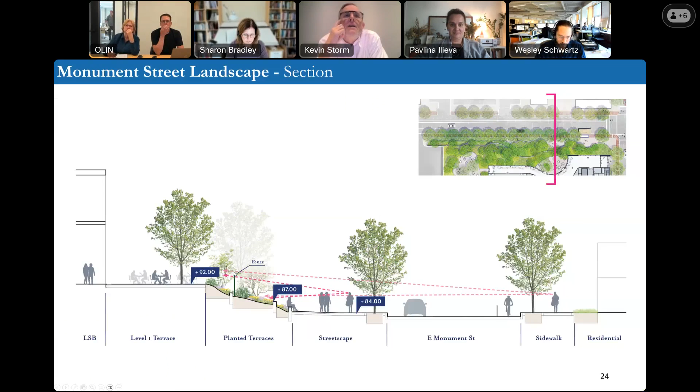Thanks. And only one other quick question. I noticed in some of the renderings there was a fence. Could you maybe just trace on the site plan where exactly the fences are happening? I think maybe in one of the perspectives you can actually see it a little better. Yeah, you can see it there, in this one here. And that kind of weaves in and out where we need the secured research spaces.

Yeah, so in plan that is roughly from the end of the building here, back. And it undulates. It kind of comes back towards the building and then it stops where the grades really drop off at the loading dock. Okay, so there's no public access up to those upper terraces. There's a clear separation.

Yeah, really these aren't access spaces, but we're trying to pull that fence back so it's really back within the landscape, not near the street. Understood. And there's no fence on the other elevations, right, on the other sides? There really are not any fences on the other sides.

It is likely that this space between Armstrong and the Life Science Building will likely be a gated space that is not free access. But McElderry Walkway and the entire landscape along North Broadway, there's no fences on any of that. Great, that's really helpful. I appreciate it. Yep. That's really all I had.

The questions. I think I want to echo my colleagues' statements. It was a really clear and concise and well thought out presentation, and obviously a really transformative project. In terms of public space, I feel like you've really demonstrated a deference to the interesting public spaces and the historic buildings around you, but you haven't let that hinder your creativity and your shaping of the building, making something stand on its own grounds and its own merits. So I really appreciate that.

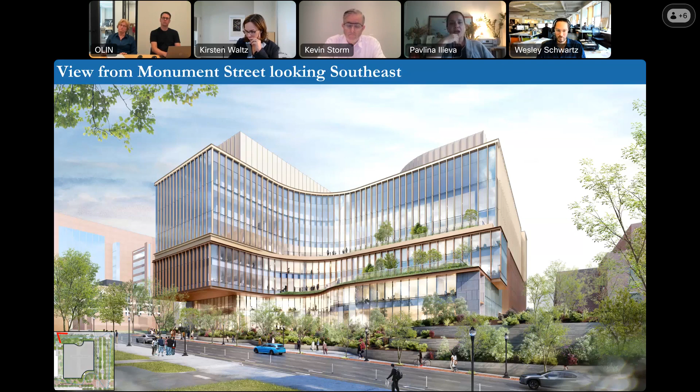I start to lose it a little bit when we go to the other side. So if we can now switch to the other view of it, because the scale of the building changes. So less of a layered approach here, it seems like a large mass that is getting a little bit of differentiation and articulation by pushing certain faces and popping other faces out, mostly because some of the masses now become taller, right?

So on the other side, it was reading a little bit more as 3, 4, 5, 6 different layers because of the landscape, and then the smaller masses stacked. On this side, it's starting to read less as that layered language and more as a single mass that perhaps is pushed and pulled and carved a little bit. So from that point of view, I also am reminded that perhaps that's okay, and perhaps the read that the building has on this side should be a little bit different than on the other side, because it's responding to very different conditions.

I think the layered approach to the landscape and the building came from the conditions of the site, this very sloped surface, and then the building just growing out of the ground into it. When we come to this side, we're in a completely different realm. Not only are we facing a very historic building, very formal, within its landscape and within its architecture, but also this entire Broadway experience has this very different read, very perspectival.

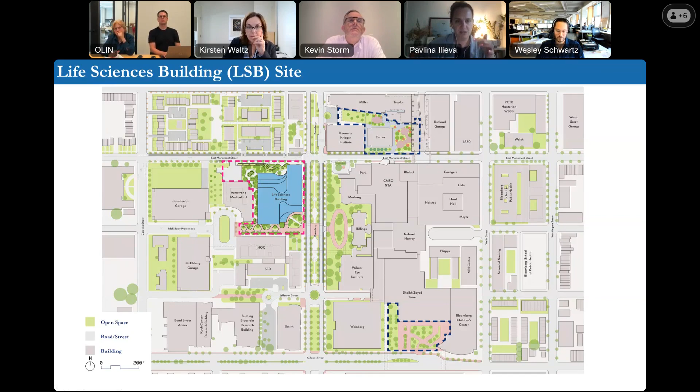To that extent, I was wondering, as you read the architecture and the landscape from the north side, and you can call the language both ways, but let me explain exactly what I mean. From there, that layered experience, I would call it additive, because it seems like it starts with a layer and then it adds another layer and steps back, but the building recedes as you're moving away from it. On this other corner, it seems to me like there is an opportunity to have a volume that's a little bit more defined and proud, in which perhaps then the outdoor space is carved into.

So instead of replicating the language that's on the other side, but to a lesser degree, I wonder if, if that was the additive side, here it can be more subtractive. So it could read as if this is one volume and the outdoor plaza space is indeed carved into it in a similar striated fashion. That is only if we really want to reinforce that language, but right now it's moving in the direction where it's sort of like a curved facade of three parts.

So something to consider, and would love to see a study, and perhaps it's more views both for the landscape, but then for the building, of how this can have a recognizable language, so that it's cohesive, as you're saying, with the rest of the building, but it's not just using a simplified, watered down version of the big concept.

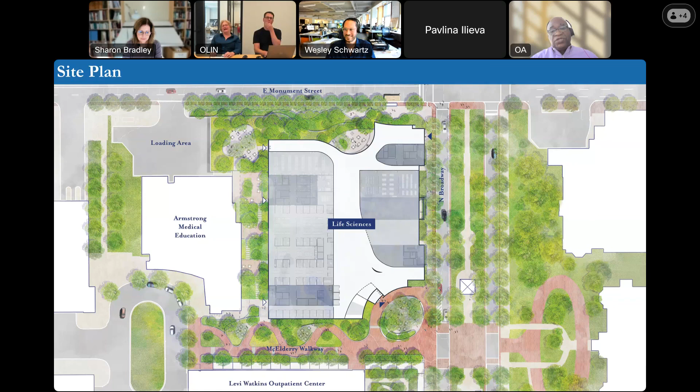I won't ask. But I think, in regards to even how you've negotiated the massing and organized the massing, I think it's very clever. Certainly it's fluid, and all sides of the building are not the same. You respect the very linear element and the powerful north-south axis of Broadway. So the facade that fronts onto that is somewhat reflective of that. Similarly, the facade that looks to the Armstrong building is certainly more rectilinear and in keeping to some extent with what you expect of the overall Hopkins campus.

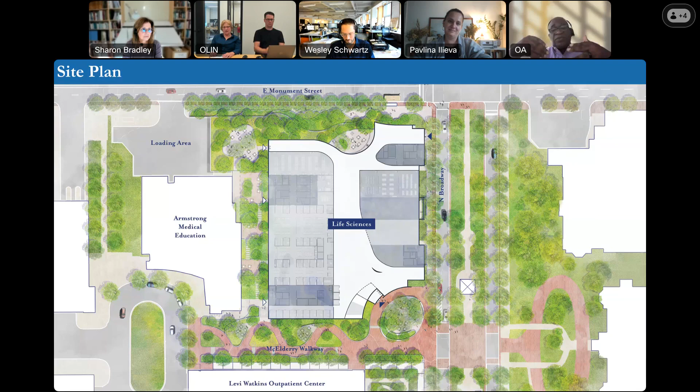When you look at it from a vertical standpoint, it's too symmetrical, right? If you understand where I'm going. So I think one mass potentially needs to either be elevated or compressed so that there's a little bit more graceful tension existing as you look at this building from this vantage point. I do agree that the monument facade or the monument vantage is way more successful, but much of that is probably a byproduct of the fact that the grades are sloping so significantly.

I do like the materiality that's being expressed here and the fact that it's changing as you go around the building. The only other point that I will make, though, is the way the glazing terminates in these belt courses. Oh, I can't say the word properly now, but it has a kind of a classical feel to it, which is actually welcoming. But as you go into the details, you don't want to overdo that because then it begins to appear as though you're mimicking something from the past. And I think that can be very dangerous. So you have to look for a very subtle way to transition that. So I think those are my comments.